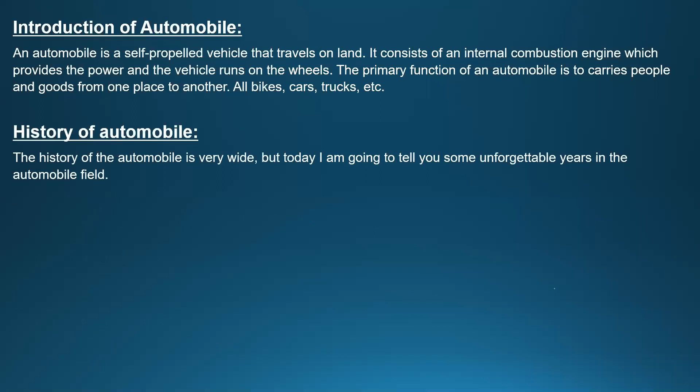Now, current trends in automobile industries. Can anybody tell me what the current trends in automobile industries are? What are the things that are going on? Anyone have any ideas? You can message there. Like most of you said, hybrid vehicles, self-driving cars, electrical vehicles. Yeah, self-driving cars are not developed that much yet. Automated driving is called self-driving. I think the current trend now is Tesla most probably.

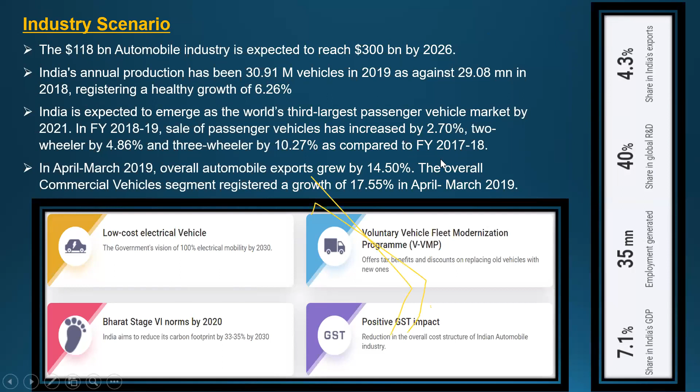I'll leave this one.

Someone has drawn something on the screen. I'm unable to erase it. I think some students have drawn it. Okay, let it be, we can't erase it.

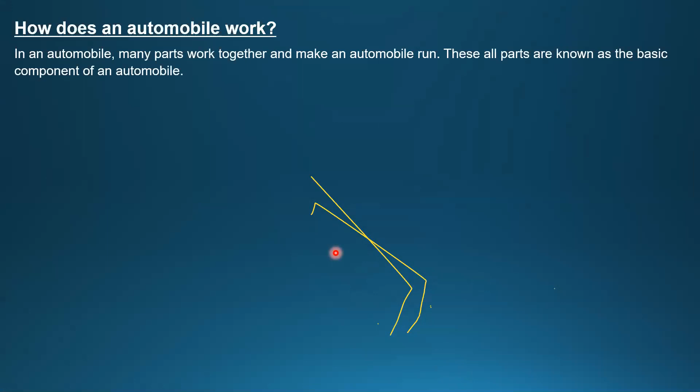Now, how does an automobile work? In an automobile, you have many parts working together to make it run. These parts are known as the basic components. Most important is the engine, which is the power unit of the automobile. Its main function is to convert chemical energy into mechanical energy by burning fuel.

Mechanical energy means kinetic energy and all those things. And this is the engine. The next is...

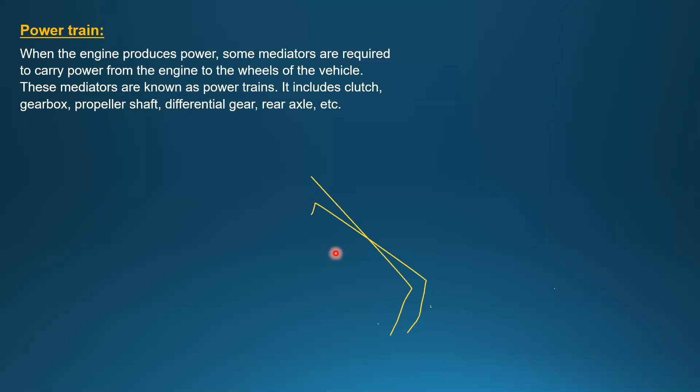Powertrain. The powertrain's main job is to transfer power from the engine to the wheel. The remaining things like gearbox, propeller, differential gear, axle, all those come under powertrain. I'll explain the brief description of powertrain later. This is the powertrain: engine, gearbox, differential, all those things.

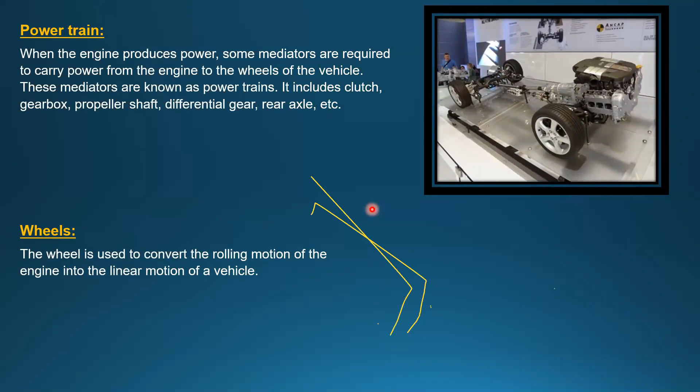And the wheel. The most important thing is the wheel because it is used to convert the rolling motion of the engine into linear motion.

Now, steering system. What is the use of the steering system? Anyone? Please share the screen.

What is the use of the steering system? Can anyone just message it? I think everybody is familiar with all the basic terms.

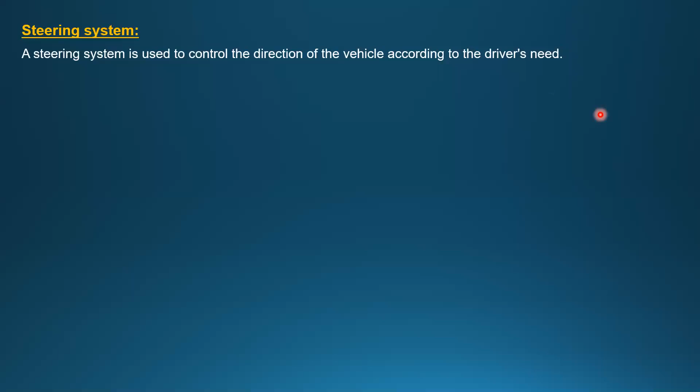Yes sir, it changes the direction, directs the vehicle. It changes direction like turning, based upon the driver's needs. Look, the steering system - if you want to take a turn and all those things, you can use the steering system here. Brake system is used to control the speed of the vehicle. Whenever you suddenly want to stop your vehicle, you can use the brake, or to reduce the speed you can also use the brake system.

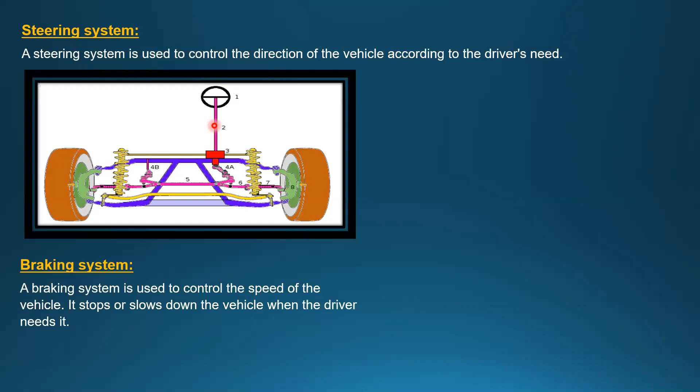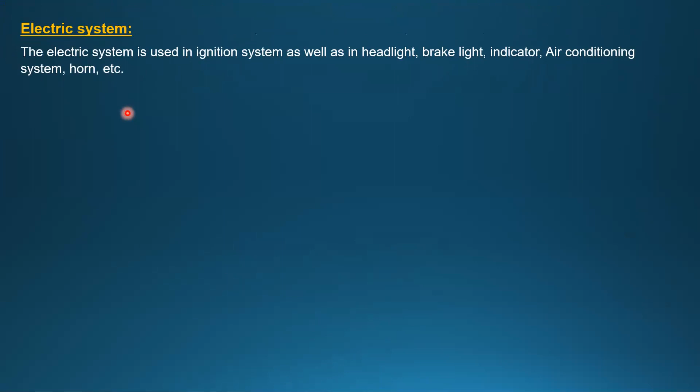Then what is the electrical system normally? Because light - headlight, brake light, indicator, air conditioning, and nowadays GPS and all those things come under electrical systems.

Now look, it's a hydrogen type, meaning it's a different fuel type. Normally its main use is headlight, brake light, indicator, air conditioning system, all the things like in a normal IC engine type vehicle. Any doubts?

Now, body - it covers all components of the vehicle, gives it a better appearance, and also provides space to drivers. Look, this is the body of your normal vehicle, where all the seats and components like headlight everything will be attached. Inside the body, wherever the headlight, brake system, and chassis are mounted, it is called body in white in technical terms.

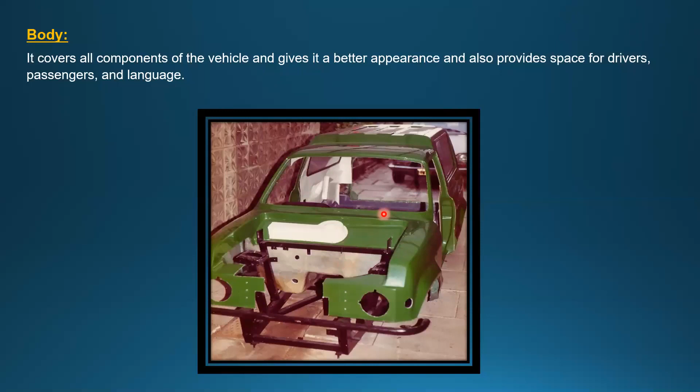The classification is based upon the use of the automobile. It is classified into different types. According to the purpose of the vehicle, it is divided into passenger vehicles and goods vehicles.

Now, according to the fuel used: petrol, diesel, gas vehicle, and electrical vehicle.

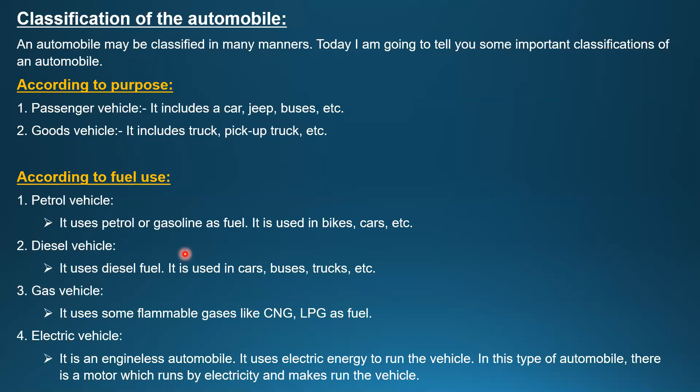Who is Santosh? Murali Santosh, yeah just check out. Something unexpected happened, sir, sorry for that. No problem, you can go ahead.

According to the capacity, vehicles are classified as heavy transport vehicle, light transport vehicle, and light motor vehicles. Heavy transport vehicle means bus, truck, dumpers, etc. Light means pickup trucks and similar vehicles.

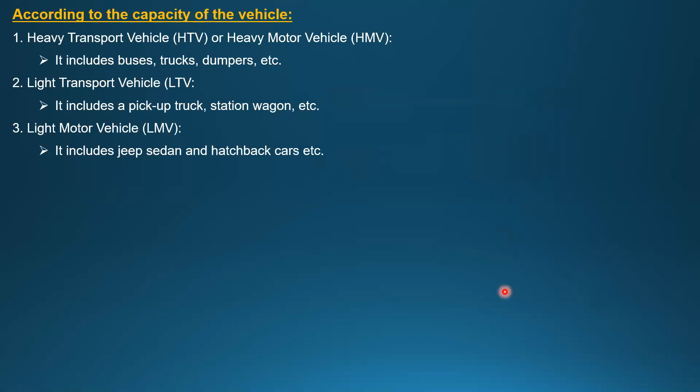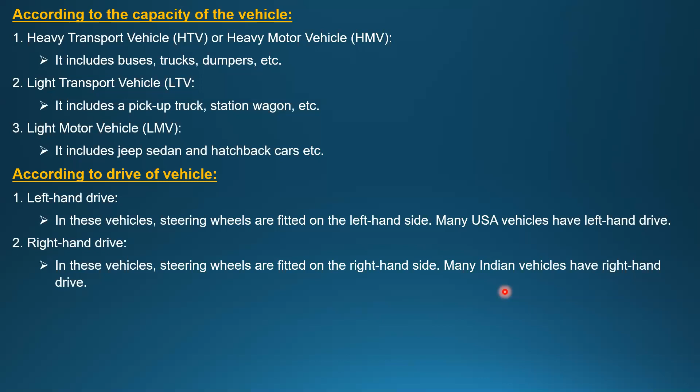Now, according to the drive of the vehicle, there is left hand drive and right hand drive. Left hand drive is most probably used in the USA. Right hand drive is most probably used on Indian roads.

Now we'll start the powertrains. The powertrain is from the prime mover to the wheels—everything comes under powertrain. The powertrain means whatever energy is transferred from the prime mover to the drive line, to transport energy up to the wheels.

What is a prime mover? Prime mover means the prime object, wherever the energy source is. The energy source is called the prime mover, either it is an IC engine or a motor. Motor means in electrical vehicles.

From the prime mover, it transfers some torque. Let's call it T-PM, and the speed is omega PM. Now from the prime mover, it is transferred up to the transmission.

In automobile industries, you can consider the total gear as a single gear, like a primary gear. From the primary gear, it reduces the speed and increases the torque, then it is converted again.

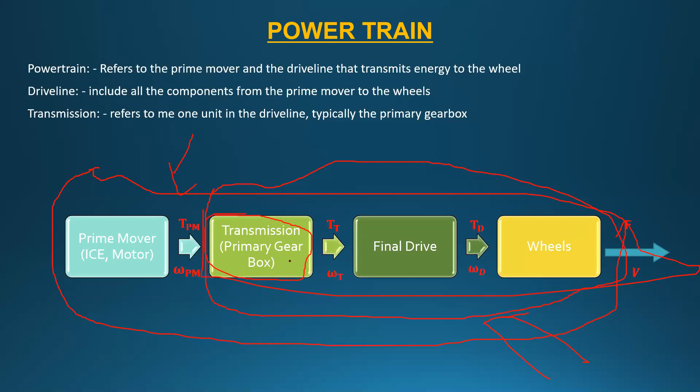Now look, here it is the powertrain.

Requirements of an automobile powertrain: what are the main things you have to take care about at the time of designing a powertrain? Can anyone have any ideas? Just send a message—what is the main job of automobile powertrains?

What is the main job of a powertrain? Degree of freedom? Low input, large output? To take power of engine to wheel—yes, that's correct. To be able to transmit power efficiently, optimize, move the vehicle—yes, correct. Transmit the power and speed—yes, correct.

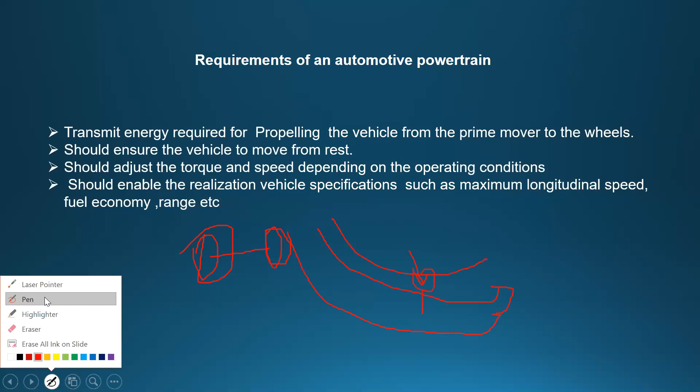If it is moving like this, whatever wheel is on the inside—let's say here—I'm just creating a rectangle type shape. Now, this one is rotating at very less speed and this one at more speed, because this one has to cover more distance compared to the other.

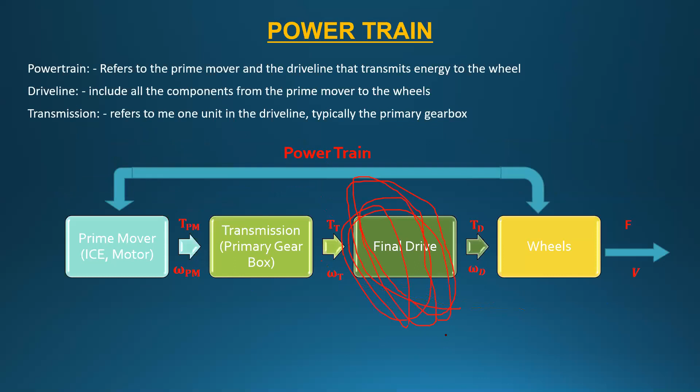Now next, let's say if you're moving on a slope - how much force is required? Most probably a lot more energy is required, no? If you are moving in a straight line, meaning a highway, here it will require very less energy. Those things are controlled by your powertrain.

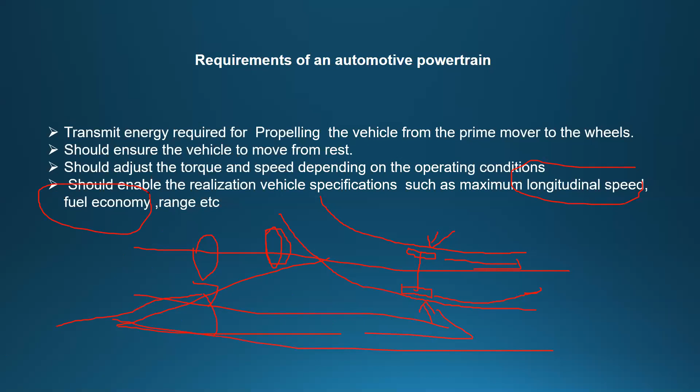Now the next point is it should be enabled to realize the vehicle specifications such as maximum speed, the fuel economy - what is the fuel economy? Meaning how many kilometers traveling per liter. Okay, the range - why is the range here? Can anyone explain range?

Let's say nowadays your electrical vehicle is also a part of powertrain. So for the range, it means in a single charge how much distance it will cover. So you have to take care about that thing - that's what your range is. Okay, any doubts? Anything? Anyone have any doubts? No? Shall we proceed?

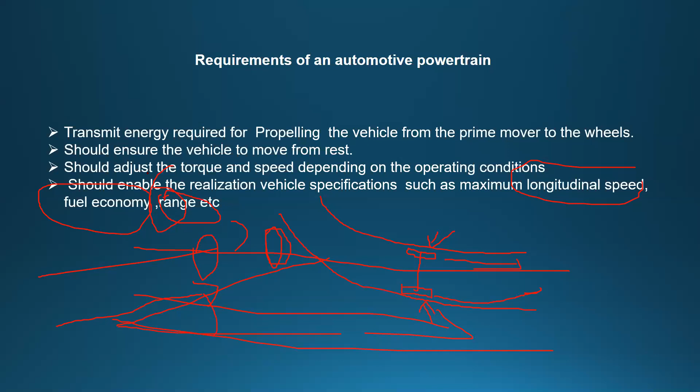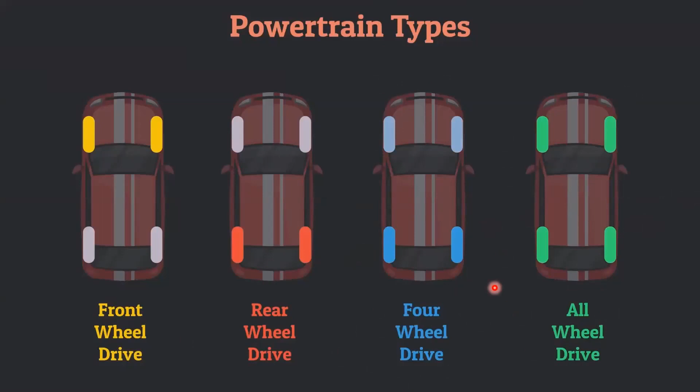Now let's go for the next - look, front engine.

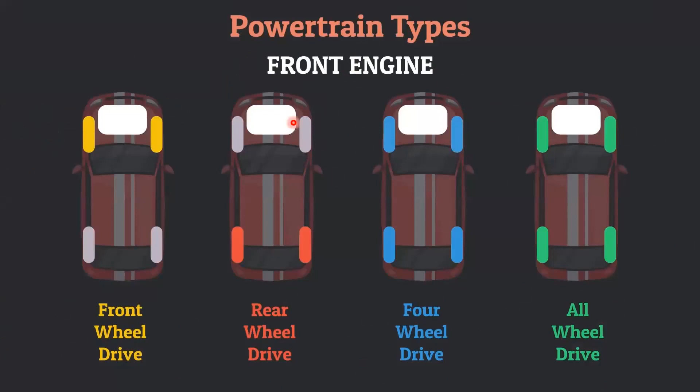Another type according to your engine positions. These four are same: front wheel drive, rear wheel drive, four wheel drive, all wheel drive. But here also another sub condition is the front engine. In every vehicle, in the front, the engine will be mounted. Now somewhere the mid engine - front wheel drive in the mid engine, rear wheel drive in the mid, and four wheel drive in the middle engine, also all wheel drive in the middle engine.

Now, and that rear engine. Let's say in all four conditions, the engine will be mounted in the back side.

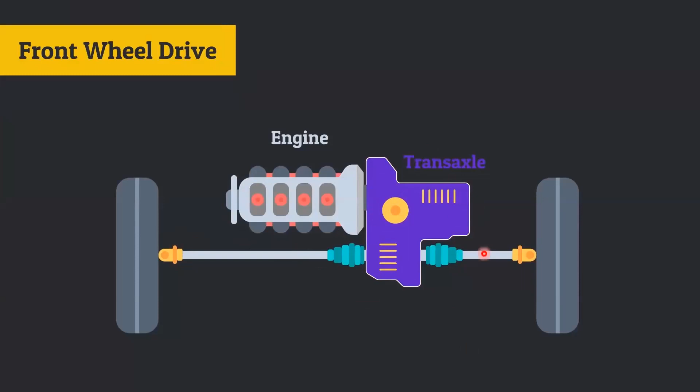Now let's go for the next. This is your front wheel drive. Here the engine is mounted, and inside this box we are having clutch, gearbox, and axle, all those things.

Now how the power will be transmitted. From the engine, it will transfer into clutch. Then from the clutch it will transfer into gearbox. In the gearbox, the speed is reduced and torque is increased. In the further, here in the axle, also the torque is increased. Then it will be equally distributed to both wheels.

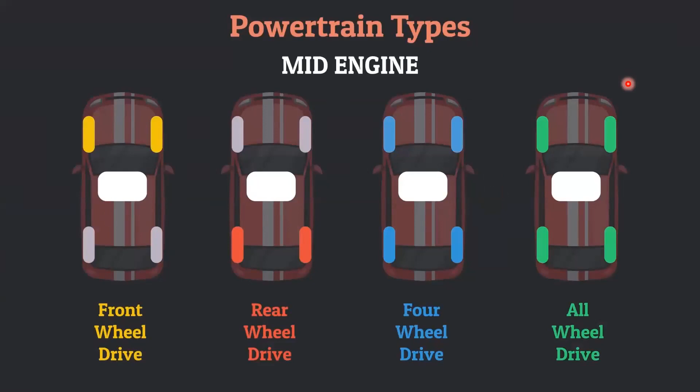Now the second one is rear wheel drive. In the rear wheel drive, what are the things there? Engine, then clutch, gearbox, UJ universal joint and propeller shaft. Then differential, then rear axle, then wheels on both sides. This is the setup of a rear wheel drive.

Now how the power is transmitted? From the engine to clutch, then clutch to gearbox, then gearbox to propeller shaft through UJ joint, then again to differential, then it divides to both axles.

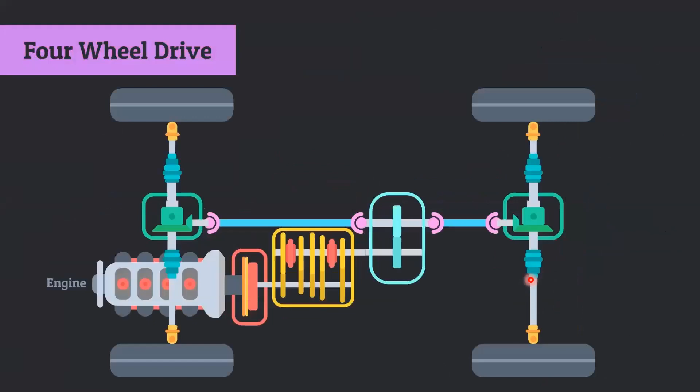Next, four-wheel drive. Both four-wheel drive and all-wheel drive have almost the same setup, but there are some little differences. Now in the four-wheel drive, let's say your engine.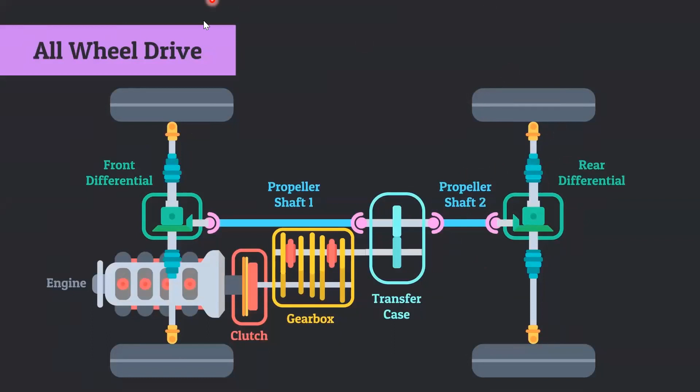This is a basic curiosity about the powertrain, all those things.

Now we'll move into the next. In this workshop, we'll use two softwares - one is CATIA, another one is Impact. CATIA is for the design, assembly and kinematics, and Impact is for the analysis part.

Now your CATIA - I think everybody is aware of CATIA. Yes or no? Yes, sir. Okay, let's.

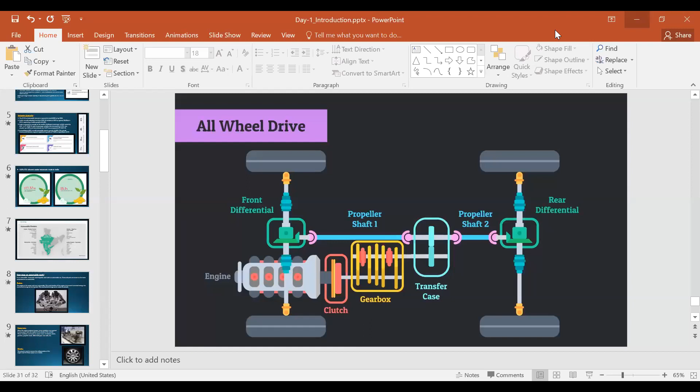Now introductions - what is the full form of CATIA? Computer aided three-dimensional. The remaining two - CAT, and what is the meaning of IA? Interactive application. Yeah, computer aided three-dimensional interactive applications.

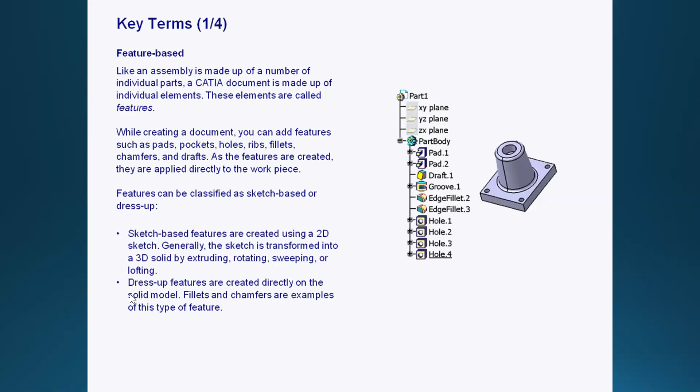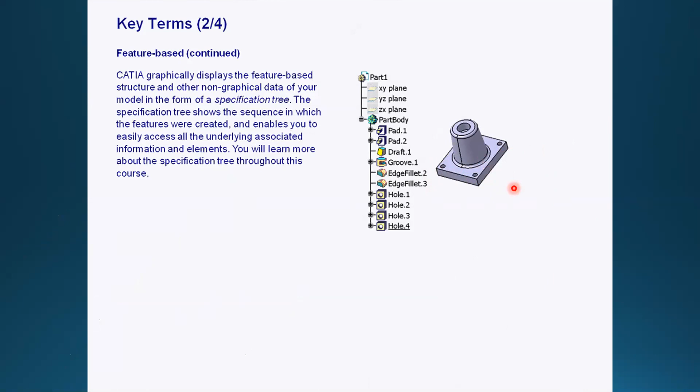Now, let's say this is one of the profiles. Now here, look how many tools - look in the lower whatever is created. This thing is called pad. It comes under sketch based feature because for creating this thing, this lower one, it requires a rectangle here. Without a rectangle you can't create this thing.

That's why it is called sketch based feature. In the top, first of all, it creates a circle and again pad - it is again sketch based features. Then what happened here? Can anyone explain?

Let's say, okay, firstly it is like this, but later on it's converted into like this. What is this one? Here also, look, it's a little bit slow. Frustum, sir. Sorry, Frustum - the voice is not clear. Send in message, Frustum, send in message.

Change the angle of the... I've used draft. Okay, draft angle. What is the draft angle? Can anyone explain?

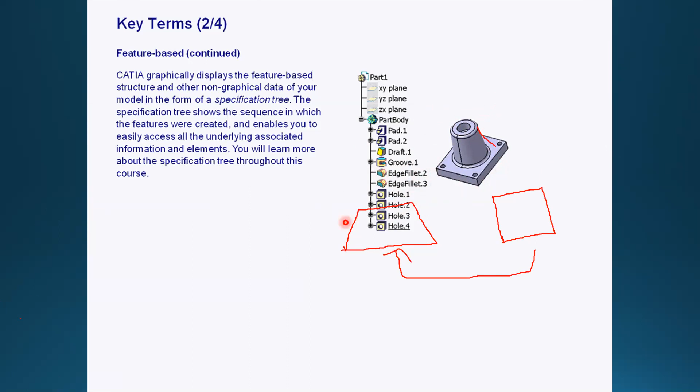Now, key terms. Parametric - what is the parametric and non-parametric model? Parametric means all the dimensions are given. Why is it required? Let's say...

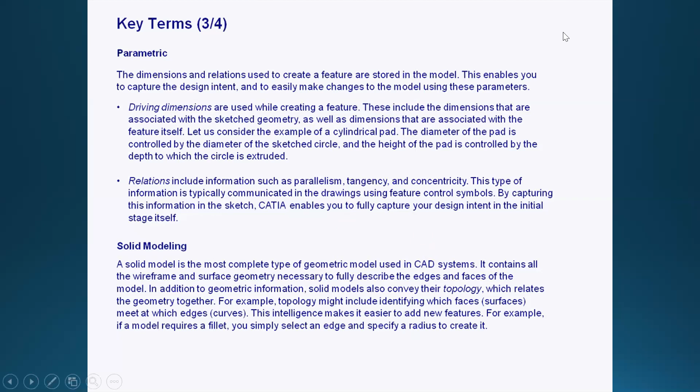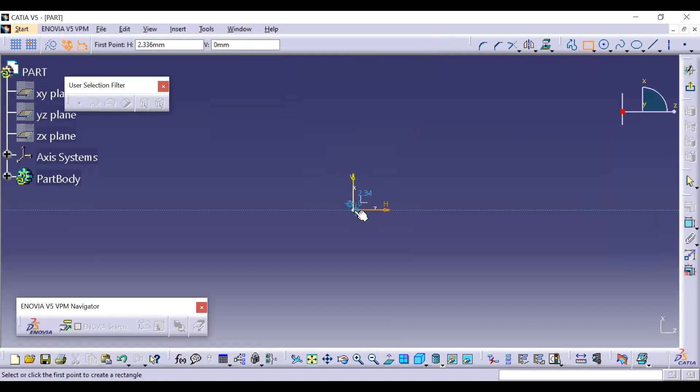Okay, let's create...

With this thing, I'll explain how you can create tomorrow. Now let's say, look here, I haven't given any dimension, which means it is non-parametric. No dimensions are given. Let's say if you apply here, like create a hole here.

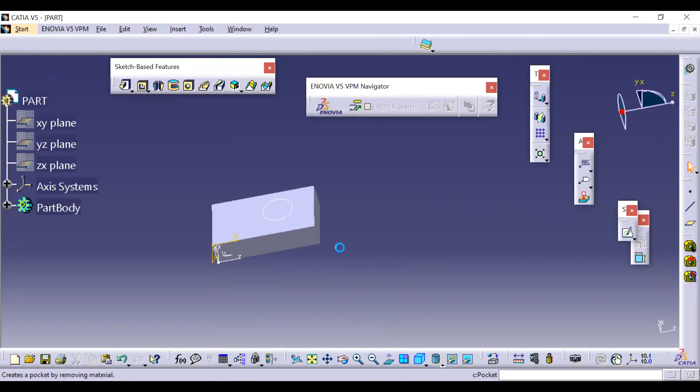Now let's say if you go again, let's say change the position. What will happen? Your main profile is automatically changed. It is not required that much. That's why if you give the proper dimensions, then you will avoid this type of error in the future.

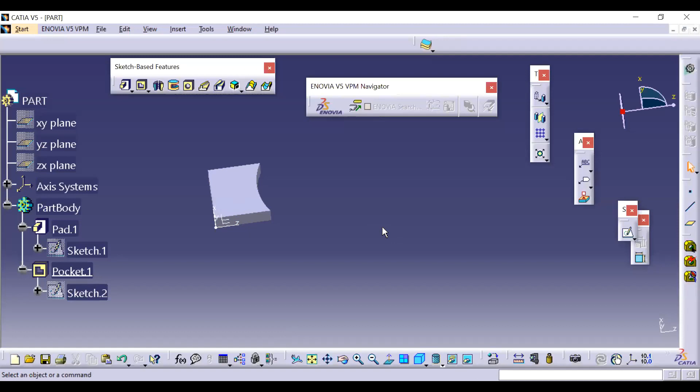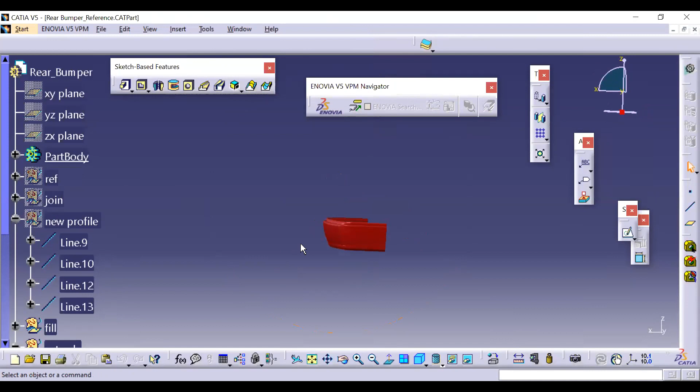Now, let's say I'll open one profile. Now look, this one is a bumper. Now next one also same.

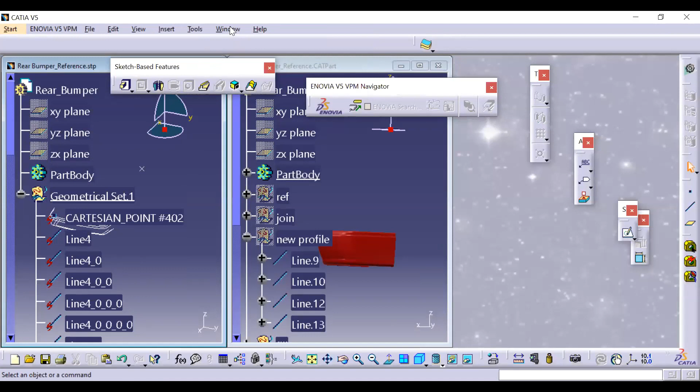Now look, on the left side is a non-parametric model. This one is a parametric model, because if you want to change this profile, you can easily change it. Look, if you double click the line, you have access to change this profile, but here it is completely isolated, non-parametric. You don't have access to edit anything. That's the difference between parametric model and non-parametric model.

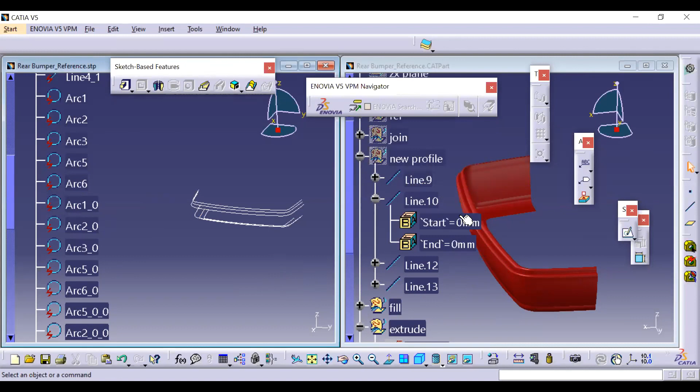Parametric model means you have to give the proper dimension. After modeling, if you want to edit later on, you can edit. But with a non-parametric model, you don't have the privilege to edit anything in that model.

Now, solid modeling is a type of geometrical modeling. Believe it, it's not that much important.

Constraint means there's something that's fully associated. A CATIA model is fully associated with the drawing and parts, assembly, and that reference it. It changes model automatically reflect to the associated drawing parts and or assembly. Likewise, it changes the context of the drawing, assembly, and reflects back on the model. What does it mean by fully associate?

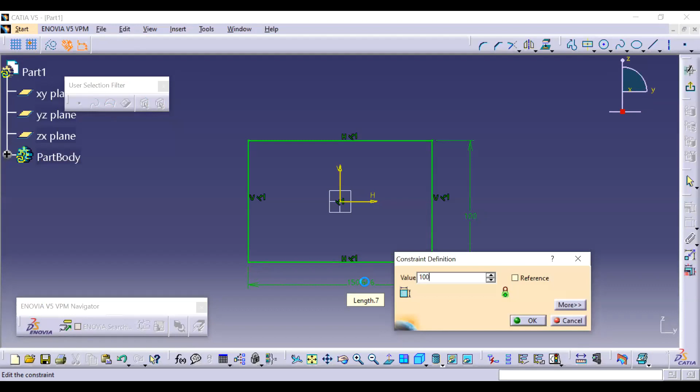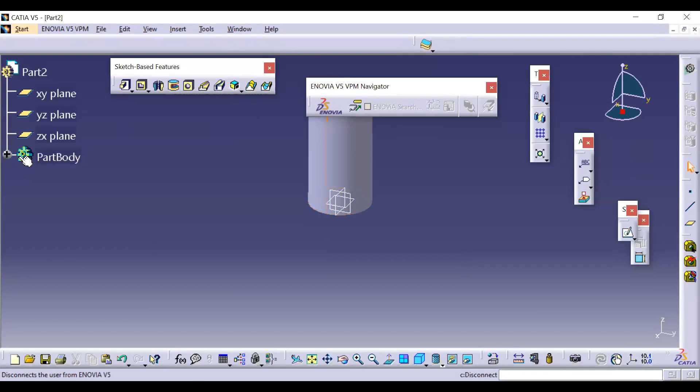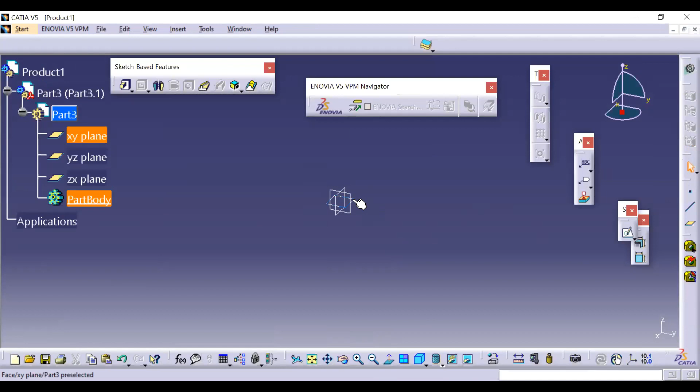Okay, a rectangle. Great. Okay, look, 100. Let's say go for... okay, directly create it, maybe some problems. Insert, import. Let's keep.

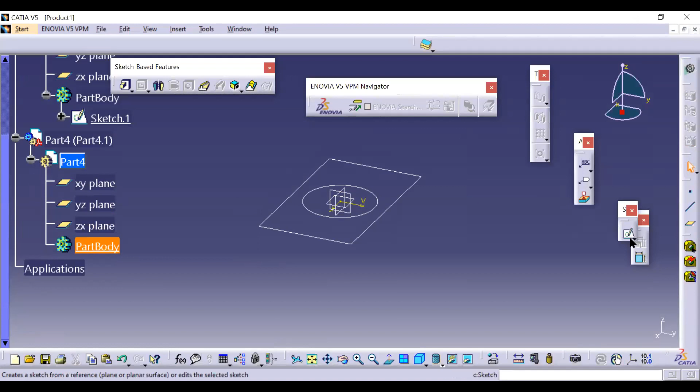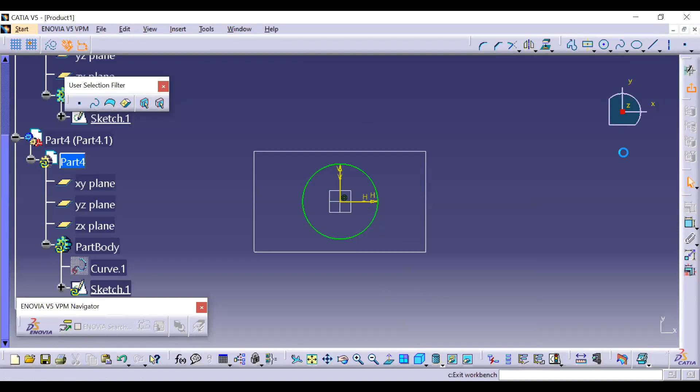Now look, I have, okay, apply coincidence. Pad 100. Now look, let's hide this one.

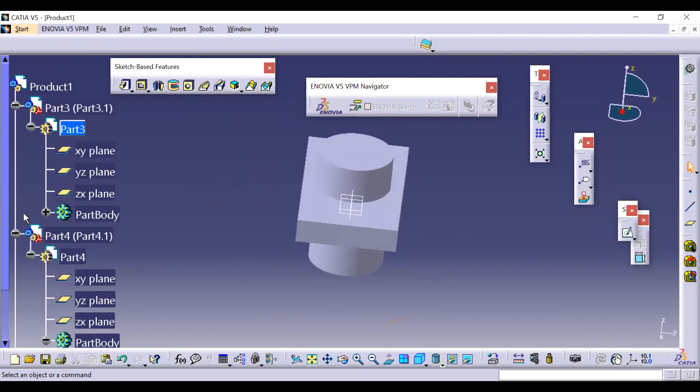This is the first model. Now this one is your second model. Now look, if you go for the part design again and change this model, let's say from 62, put it like 55.

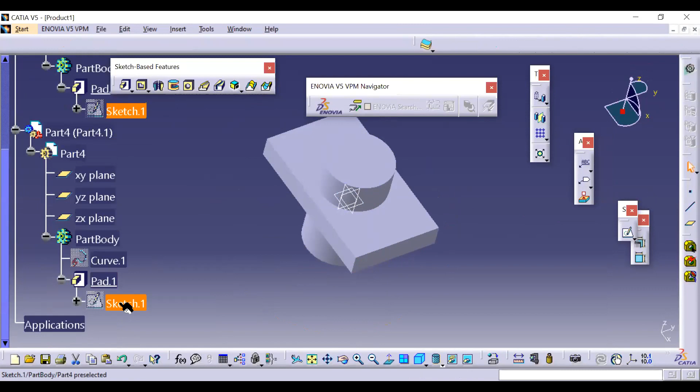Now exit. Look, by default, your profile is changing here. Let's say if you go for the drafting, if anything changes here, whatever the link, automatically it will be updated.

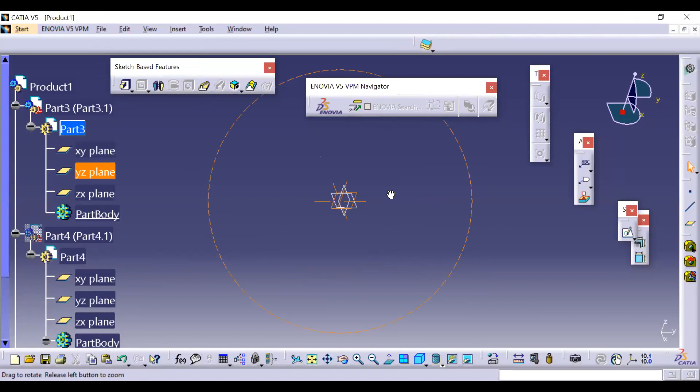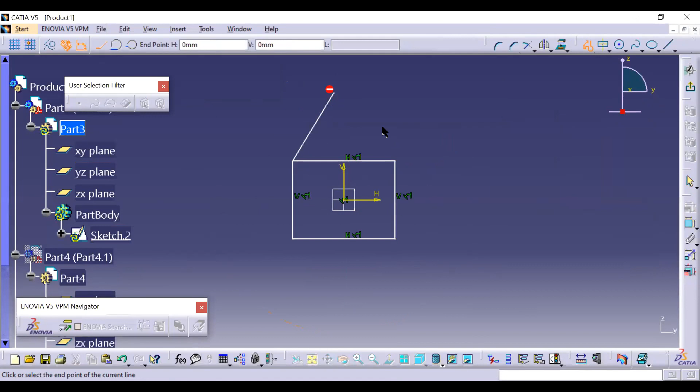Look, here in the part design, let's delete everything here. Let's say you want the YZ plane here, select normal sketch, you enter. Draw something, like this type of profile. Exit. Sorry, it will not add. Now exit. Pad.

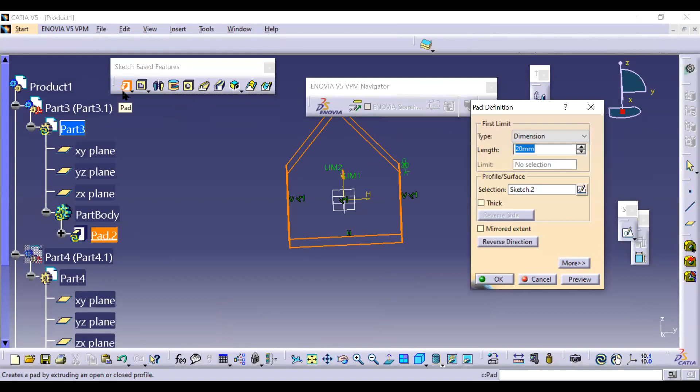Let's say if you need this one. If you want to work on this surface, let's say, if you go for directly sketch, then it will appear like this.

But if you want this to appear like this, the sketch must be appeared like this. So here, go for the position sketch, select your profile. Look, where is the horizontal? Where is the vertical? Vertical is a horizontal. But if you need this one exactly, whatever you are viewing, exactly in the sketch, so you have to keep vertical and horizontal.

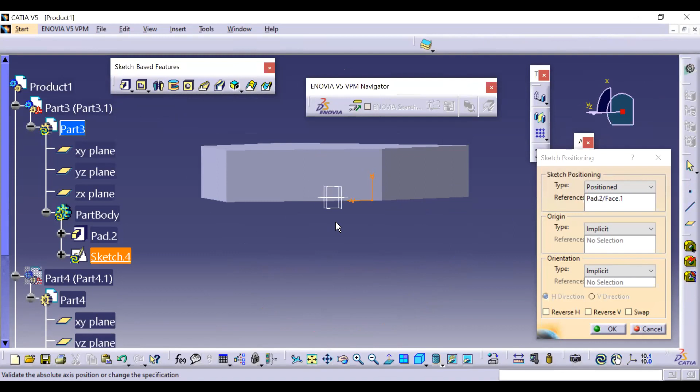Let's say, I think vertical and horizontal is visible to all of you or not? Okay, look, let's say you need this horizontal here, the straight. Let's say swap. Okay, the position is changed. Look, vertical, then horizontal, then change horizontal this side. Reverse H, then press OK.

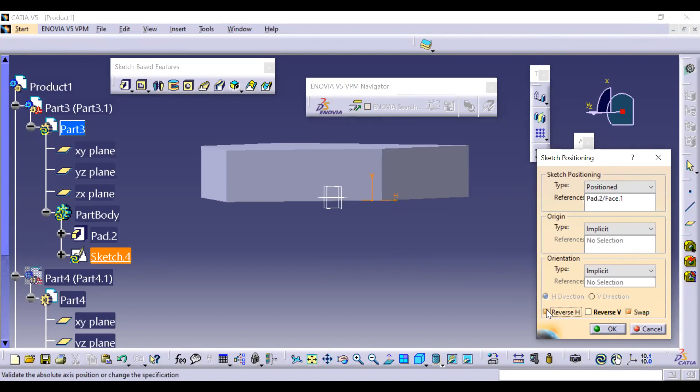Look, whatever here the sketch is available, straight it will appear there. It's the same thing. Just select, go for normal sketch. Look, the position is automatically changed. That's the difference between sketch and position sketch.

Now constraint is clear. I think constraint means you have to give the parallel, perpendicular, horizontal, vertical, and dimensions. That's called constraint. Design intent.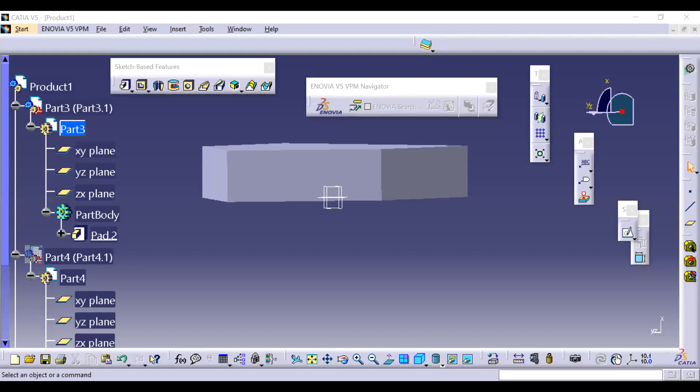Okay. Design intent. What is design intent?

Anyone have any idea? What is intent? Send message. Okay, don't unmute yourself, it's creating disturbances. Okay.

Do you have any idea what design intent means? What does it mean by design intent? What is the difference between mirror and symmetry?

Okay, I'll explain later on. Okay, whenever tomorrow it starts, I'll explain it. Later on, whenever it appears, I'll explain. Mark.

No, design intent means how you are proceeding. Okay.

Let's say it's a plan. Okay, how you are constructing your solid model. Okay, look, if you are creating, let's say, a hole, you can create that hole in 3 or 4 different types. Okay, that's the thing about how you want to create it.

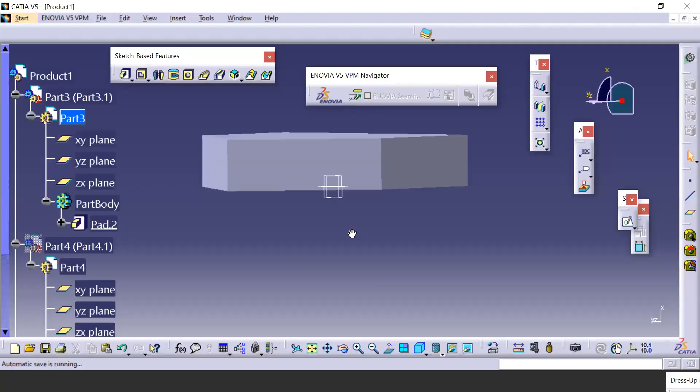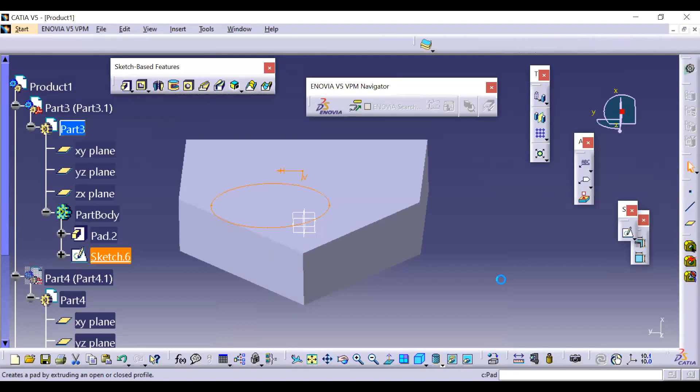Let's say if you applied mirror, let's say you create a profile here, in this surface. Now let's say pad. Now let's say if you delete this one, what will happen?

Update diagnosis error. Why? Because your sketch, whatever you created, this small cylinder, depends upon this surface. So you have to take care about this.

What is the meaning of that? Okay, previously you have to decide. Let's say if you don't want to create exactly on this surface, what do you have to do?

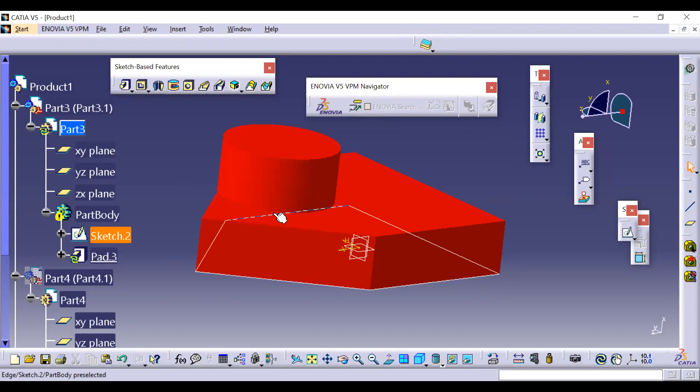You have to create a plane, and after this you have to create this profile.

First is automatic relations based on how the sketch is created. Automatic relation means, let's say I created the circle. I haven't given any relation between the previous solid and this circular shape, but automatically the relation is created. Then there are equations and additional relations and dimensioning.

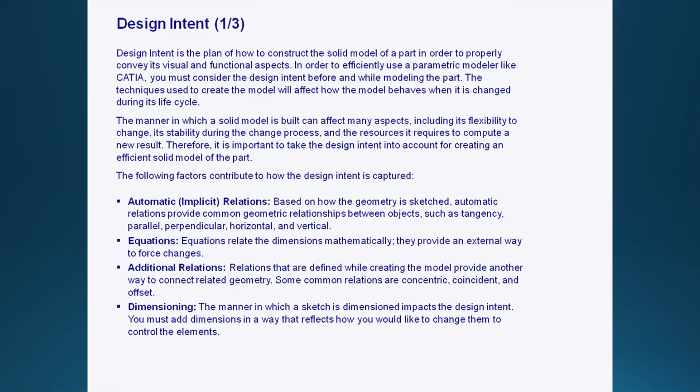This is now, let's say, the design intent of a sketch, meaning 2D drawings. Look, these three drawings are equal, everything is equal, nothing is different. The only difference is the way you have given the dimensions.

Total is 110. From this center to here, 20, this side 20. From here to this side, 90, 20. From here, 20 and 70. What's the meaning? Let's say if you created this one.

And if you increase this one from 110 to 150, what will happen? These two will be... just give a second.

You are given dimension from this side to the center point, from this corner to the center point. From 110, if you increase up to 200, what will happen? These two circles automatically move toward these two corners because you have given dimensions from both sides.

In the first one, what will happen, versus the second case? This one is given 110, from here to the center, and here from this point to this middle point. If you change this value from 110 to, let's say, 200 here...

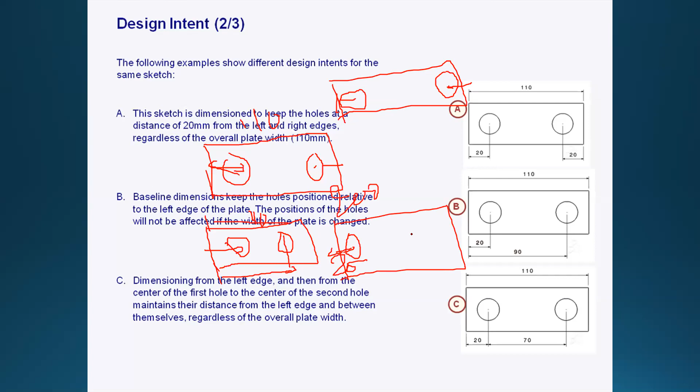What will change in this design intent? This one is a circle, this one by default is 20, it will not change. But here it will be kept like this, in the center 90 - between these two, already 90 is given.

In the previous diagram, this circle is nearer to this side, but here it comes exactly in the middle. Not exactly - 90 means the difference distance from the center is 10,10. Previously it was 20, but now it is 10. See how things changed here.

For this one, for the second one, it completely depends upon this face, this center one. But for the third one, where the circle will go depends upon this point, also this point, and this line.

Let's say, from here to 20, from here to this point, 90. If you increase this value, this 20, and convert it into 30, what will happen? From this center to this point, the total will increase up to 120.

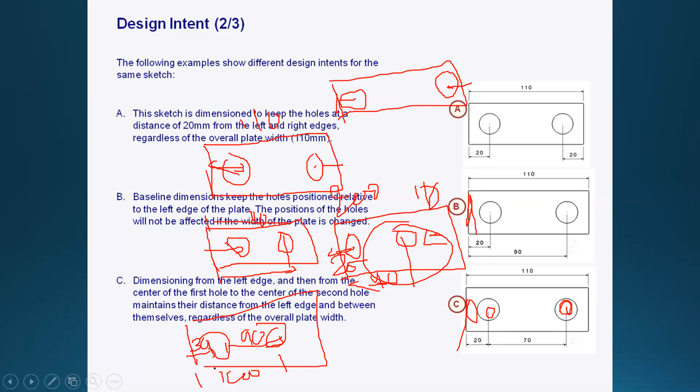This is the one-time design. Okay, now next, let's say this is your...

What is the parent-child relation? It will be explained in future. On the third day we're having assembly, at that time I'll explain.

Anyone have any doubts right now? I think that's almost it.

Okay, I'll complete these three things today.

The next one is manufacturing approach. Manufacturing means - sorry, I'm not talking about the manufacturing aspect here, I'm talking about the design aspect.

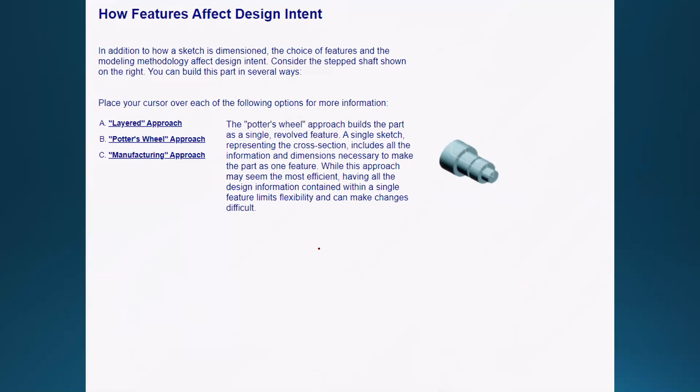In 2D you create like this, one by one, then directly revolve - using that option you can create this directly. But in the manufacturing approach, first you create the total big shape, then remove the next big one, then remove again, then remove again, then remove again. It's like the manufacturing approach, whatever I told you about the lathe machine type.

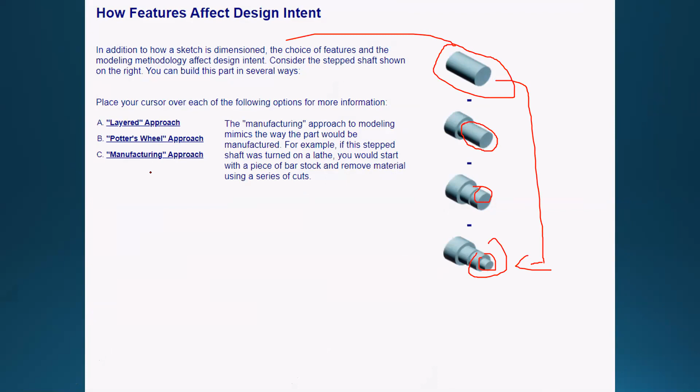Is there any doubt in these three steps? Turning, correct.

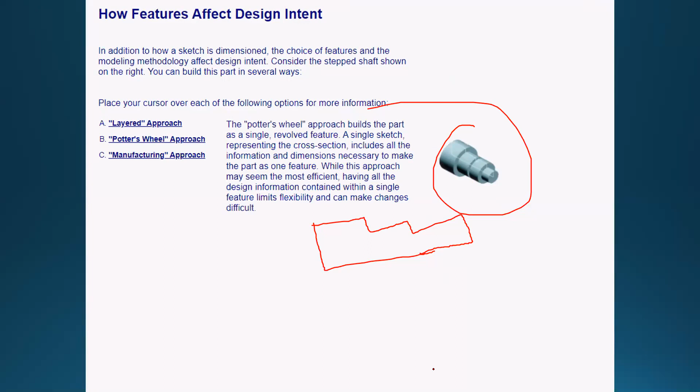Anyone have any doubts right now? What is the... I didn't get your question. Wait, I'll give access to the mic.

Sir, in both the approaches, are we getting the same work, sir? Yes. In all three approaches you get the same output, but how you are creating it, that's the thing.

I think the manufacturing approach is lengthy, sir - why do we use that? We need to take more material, we need to do more steps. It's about the approach - depending upon the requirement only, you go with that one. Depending upon the situation, it's not mandated that you have to use it. For example, if you're working on digital manufacturing, then you have to work on that manufacturing approach process only, you have to follow that one.

And for the other approach, it will directly create it, depending upon the situation - what output is required for future updates, from where you will use it. It depends upon your drawings, what output is required for it.